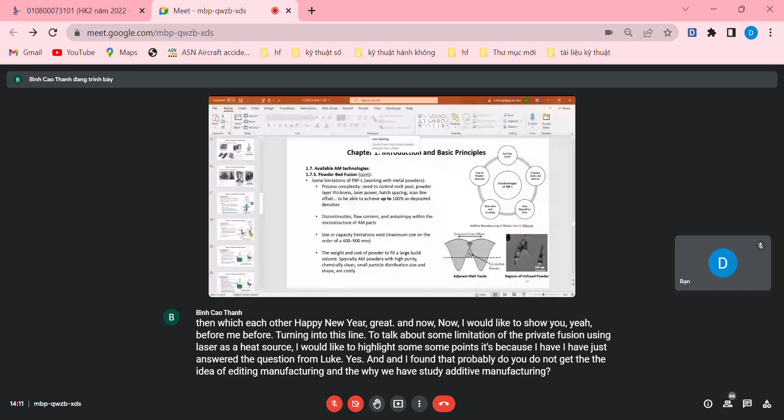Because I have just answered several questions, I found that probably you do not get the idea of additive manufacturing and why we have studied it. You know, but probably you forgot what we discussed the first time, about the advantages and disadvantages of additive manufacturing and the relation between additive manufacturing and sustainability. Let me make this clear, I'll discuss this with you in Vietnamese.

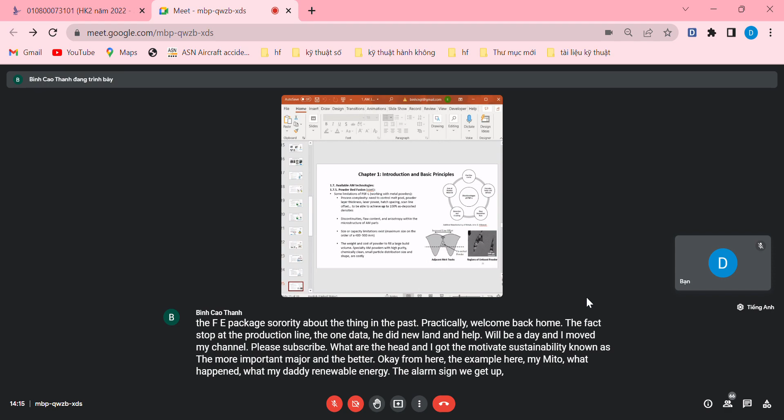Mục tiêu về sustainability là rõ ràng, và mọi quá trình hiện nay, đặc biệt trong chế tạo máy hoặc chế tạo các phương tiện giao thông, người ta đều chú trọng tối ưu hóa cấu trúc để giảm khối lượng, tăng khả năng vận hành, từ tàu, thuyền, máy bay, tàu hỏa. Ngoài ra còn sử dụng năng lượng thay thế, renewable energy, để làm xanh. Việc kết hợp giữa năng lượng thay thế và tối ưu hóa cấu trúc để giảm khối lượng của các vehicle sẽ đem lại rất nhiều lợi ích, hướng chúng ta đến một xã hội bền vững hơn.

Additive manufacturing ngoài việc giảm lượng vật liệu tiêu hao trong quá trình chế tạo, vì đây là near shape component, thì bản chất cũng cho phép chế tạo ra những chi tiết được optimize.

Tại sao những chi tiết optimize này lại phù hợp với additive manufacturing? Bởi vì chúng ta chế tạo layer by layer, nên không cần biết nó phức tạp như thế nào, bên trong rỗng, ngoằn ngoèo ra sao, chỉ cần theo layer by layer approach là có thể chế tạo được những chi tiết phức tạp như thế.

Còn traditional manufacturing process theo phương pháp cutting, dụng cụ cắt phải tiến được đến bề mặt cần cắt thì mới cắt được. Nếu bề mặt cần cắt nằm bên trong chi tiết thì hoàn toàn không làm gì được. Ngoài ra những chi tiết phức tạp sau khi tối ưu thì thường những vùng rỗng bên trong là vùng khối lượng vật liệu không cần thiết, đã được tối ưu và bỏ đi rồi.

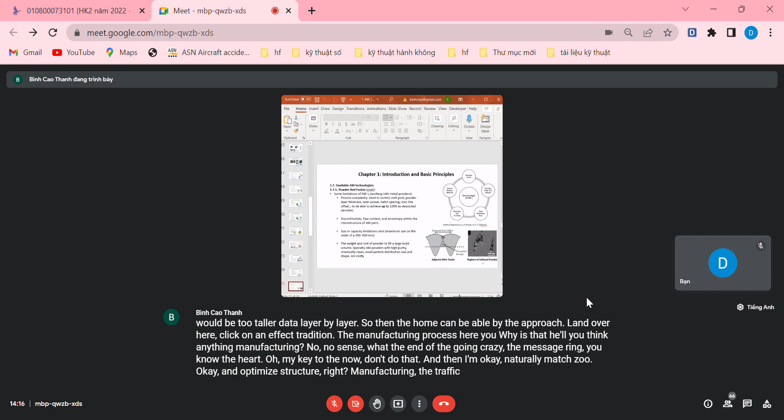Additive manufacturing sản xuất được những chi tiết đó, còn traditional manufacturing thì là dấu hỏi, không phải trường hợp nào cũng chế tạo được. Cho nên nó tạo ra một sự naturally match giữa optimize structure và additive manufacturing. Điều này cho phép chúng ta tiến nhanh hơn tới một xã hội bền vững nhờ chế tạo ra những thành phần của máy giảm được khối lượng, trong khi khả năng sử dụng tương đương, thậm chí tốt hơn so với chế tạo bằng phương pháp truyền thống.

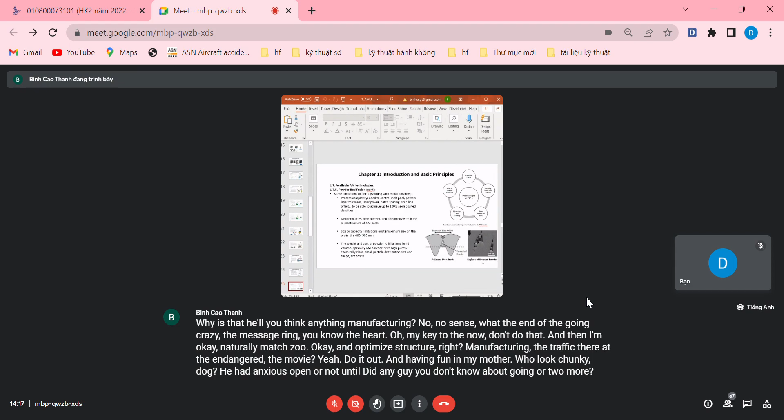Những yếu tố này tôi sẽ nói với các bạn ở cuối chương 1, đó là sustainability advantage and challenge của additive manufacturing.

Tôi muốn giới thiệu trước để các bạn hiểu tại sao người ta đang rất quan tâm đến additive manufacturing, bởi vì khi chế tạo ra những chi tiết đã được tối ưu hóa về cấu trúc thì nó nhẹ hơn rất nhiều. Khi ứng dụng trong lĩnh vực hàng không, khi chúng ta nhẹ đi, có nghĩa là phần năng lượng tiêu thụ để mang mỗi máy bay bay đã được giảm, thì việc sử dụng nhiên liệu sẽ được tối ưu hóa.

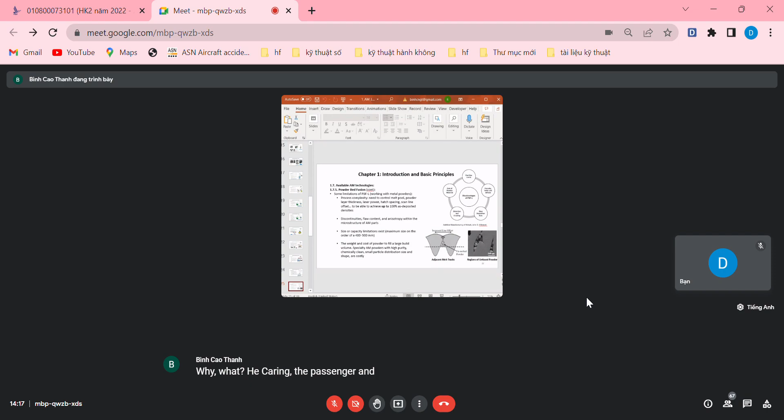Để chúng ta carrying passenger, cargo, hoặc fly with longer distance, đấy là những điều thiết thực mà khi sử dụng additive manufacturing có thể mang lại cho chúng ta.

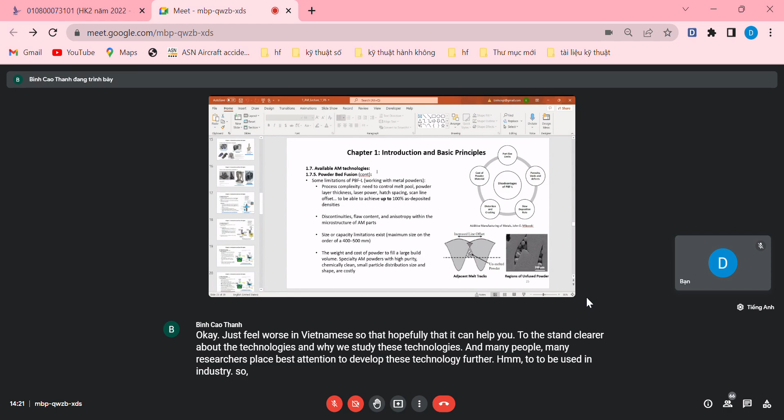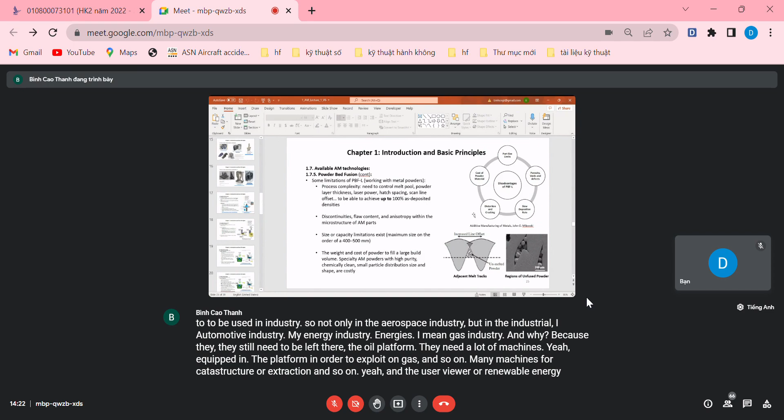Just a few words in Vietnamese so that hopefully it can help you understand clearer about the technologies and why we study these technologies. Many researchers pay special attention to developing this technology further to be used in industry, not only in the aerospace industry, but in other industries like automotive industry, like energy industry, oil and gas industry. Why? Because they still need to build up oil platforms. They need a lot of machines and equipment to build the platform in order to exploit oil, gas, and so on. Many machines are used for gas extraction, oil extraction, and so on. And yeah, and the use of renewable energies like hydrogen, and from the sun.

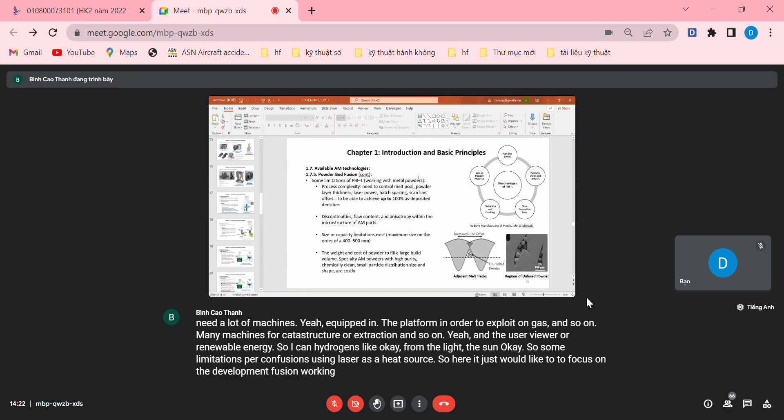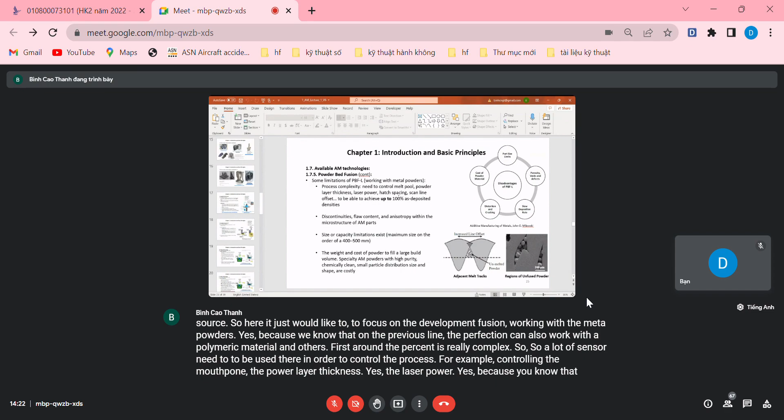So some limitations about powder bed fusion using laser as a heat source. Here I just would like to focus on the powder bed fusion working with metal powders, because on the previous slide, powder bed fusion can also work with polymeric material and others. First of all, the process is really complex, so a lot of sensors need to be used there in order to control the process, for example controlling the melt pool, the powder layer thickness, and the laser power. The layer thickness is quite important. As I've explained before, if the layer thickness is high, is large, then you have the staircase effect, and in this case you would have lower surface quality.

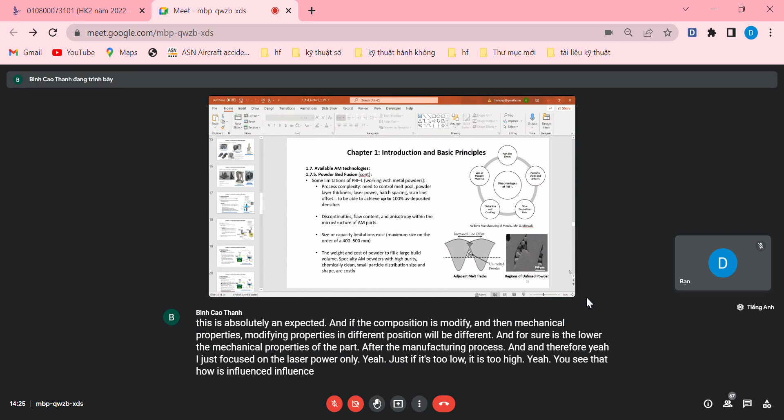So I just focused on the laser power only, showing how if it's too low or too high it influences the quality of the part after manufacturing. Therefore it needs to be controlled using some kind of sensor to check whether it's fine, and to provide feedback to calibrate the system to achieve the highest possible quality.

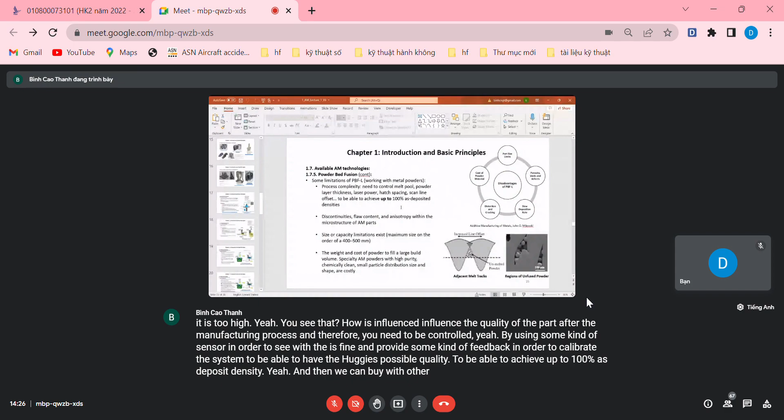This is to be able to achieve up to 100% density. You can also combine this with post-processing steps like hot isostatic pressing, which applies both heat and pressure after the manufacturing process, in order to eliminate porosity and help improve the density up to 100%.

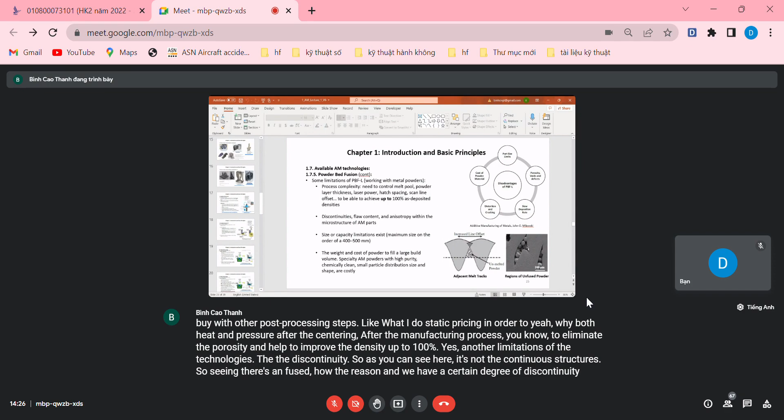Another limitation of the technology is discontinuity. As you can see here, the structure is not continuous. Since there are unfused powder regions, we have a certain degree of discontinuity, and this region generates stress concentrations. We need to eliminate the stress concentration areas, but here we have this limitation.

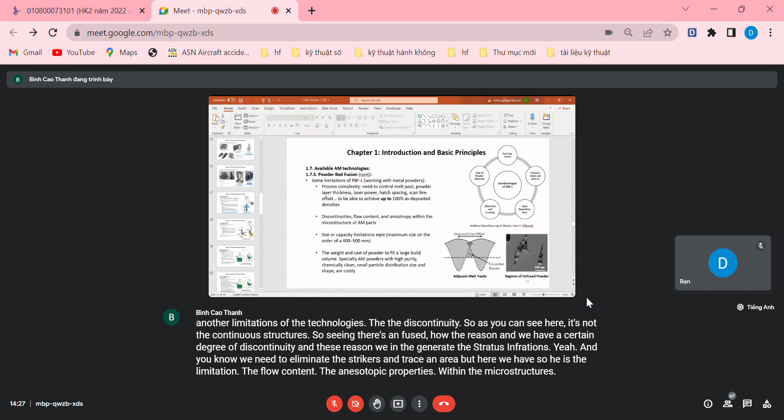The resulting anisotropic properties within the microstructure occur for sure, because it's a layer-by-layer building approach, and therefore not only this technology but other AM technologies also create materials with anisotropic properties.

Size and capacity limitation, yeah for sure. As I explained, especially for powder bed fusion, everything needs to be handled inside the building chamber, so the size of the building chamber will limit the size of the part.

In another case, if you want to create a part larger than the building chamber, you may think of dividing the part into different subcomponents, and after printing the parts or subcomponents, you assemble them together. But it should not be too large with respect to the limitation.

Also, if you divide the part into different subcomponents, you should consider that it will be more complex, and the cost for the designing process and the material will be greater, for sure.

The weight and cost of powder to fill, yes, this is one of the points.

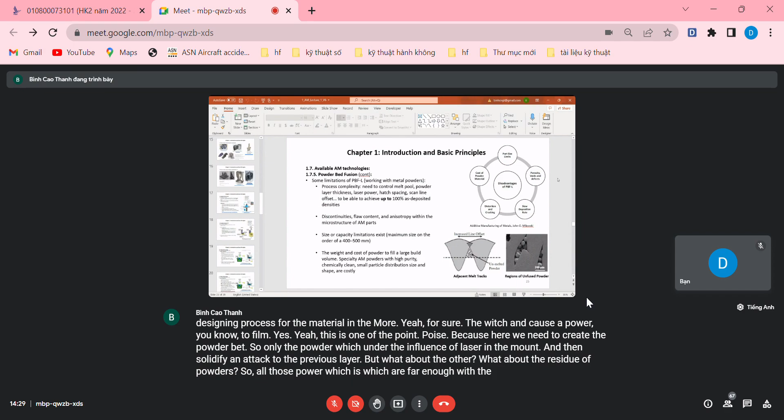Because here we need to create a powder bed, only the powder under the influence of the laser will melt, solidify, and attach to the previous layer. But what about the other, residual powders? What about those powders that are far enough from the irradiated laser irradiation areas?

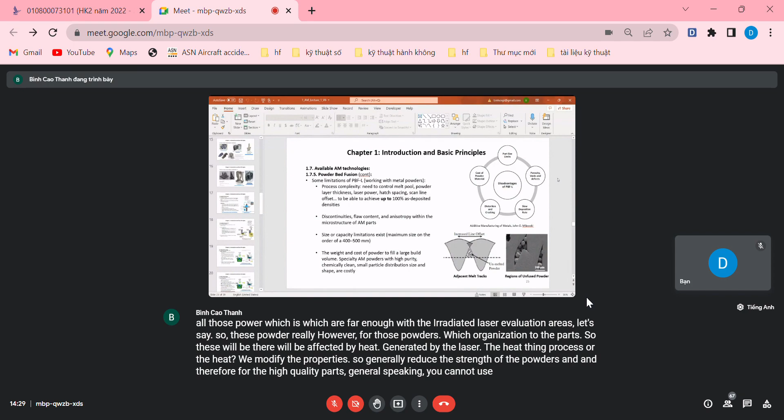So these powders are used. However, for those powders adjacent to the parts, they will be affected by the heat generated by the laser. The heating process modifies the properties, generally reducing the strength of the powders. Therefore, for high quality parts, you generally cannot use the residual powder after the manufacturing process.

You must recycle it to guarantee the quality of the part. But for other cases, if the part does not require the highest quality, you can reuse the powder simply to save money.

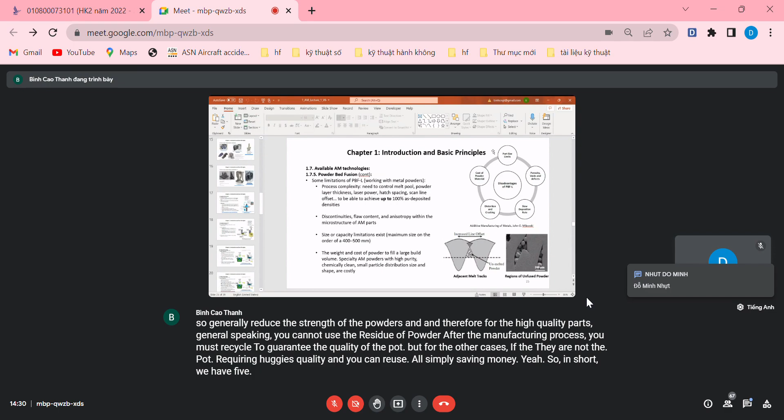So in short, we have five remarkable limitations, which are graphically represented in this figure. The part size limit is due to the size of the chamber.

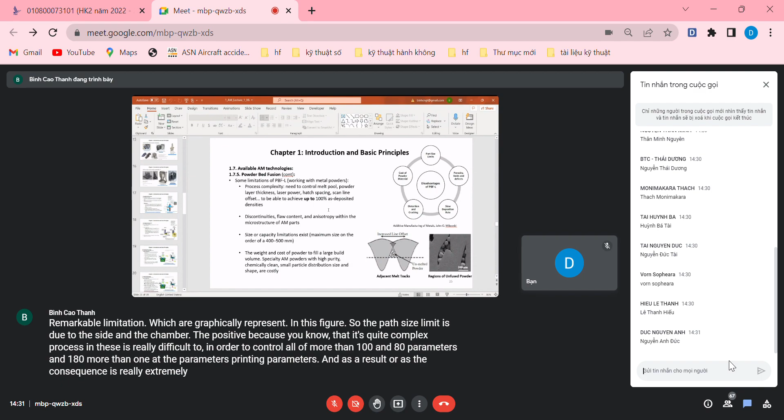The porosity issue arises because it's quite a complex process, and it's really difficult to control all of the more than 180 printing parameters. As a result, it's extremely difficult to obtain 100% relative density. In other words, you should expect the presence of porosity, voids, and other kinds of defects like flaws.

Slow deposition rate, yes, sure, because the minimum layer thickness is just 20 microns. So the larger the part is, the larger the number of layers needed in order to fabricate the part. Because the layer thickness is small, you need many more layers to completely fabricate the part, and that slows down the production rate.

And you also need time in order to melt the material and wait for solidification. So it needs time as well.

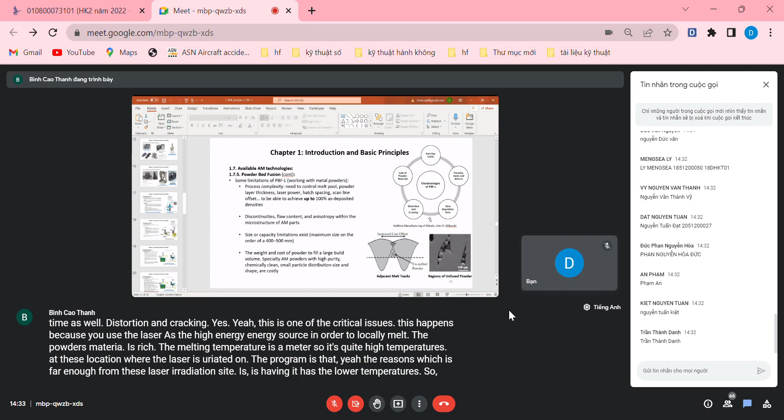Distortion and cracking, yes, this is one of the critical issues. This happens because you use the laser as a high energy source to locally melt the powder material, reaching the melting temperature of the metal, which is quite high. At the location where the laser is irradiated, the other regions far enough from the irradiation site have lower temperatures. So there exists a thermal gradient between the two regions of the same part.

So it creates residual stress. And when the stress is released after the manufacturing process, it creates distortion and cracking.

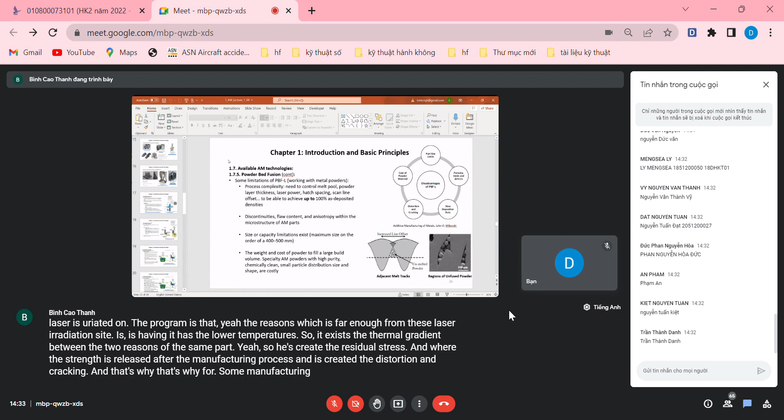For some manufacturing processes like powder bed fusion, we will heat up the building plate up to, for example, 200 degrees C, in order to reduce the differences in temperature in different regions of the part, to avoid distortion and cracking.

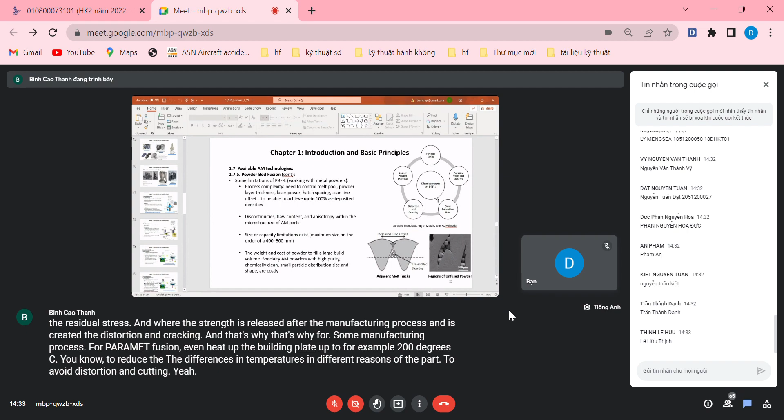And also the presence of support structures helps to dissipate the heat from the part during the manufacturing process, to somehow guarantee that the thermal gradient inside the part is reduced, and to reduce or avoid distortion and cracking.

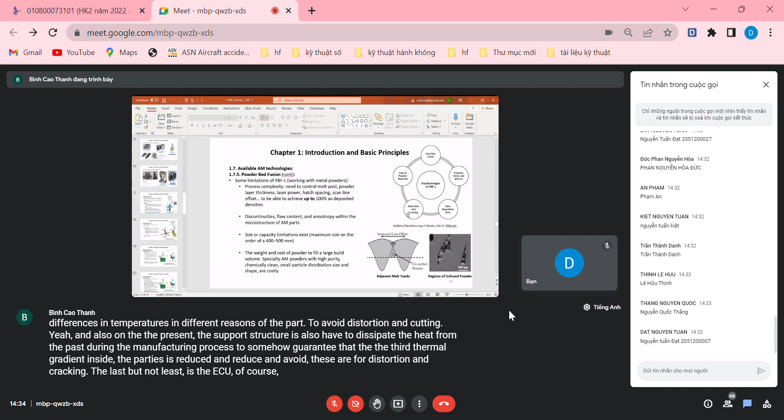Last but not least is the issue of cost of powder materials, because generally speaking we want to have regular powders in a spherical shape. If you have an irregular powder shape, packing them together with high density is pretty hard.

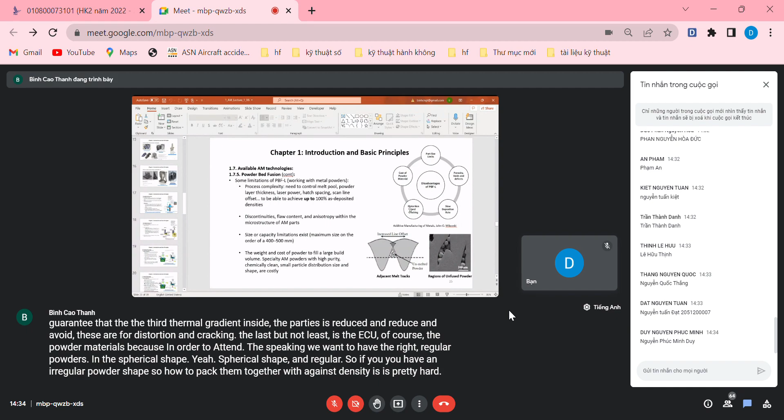And the cost for making powders is relatively high, resulting in the high cost of the part after the manufacturing process. This is the high cost of the product.

Just one point, but it's a little bit difficult to explain here. You see the figure named adjacent melt track, next to the figure highlighted with the region of unfused powder. So you see, if there are two scanning lines or scanning vectors.

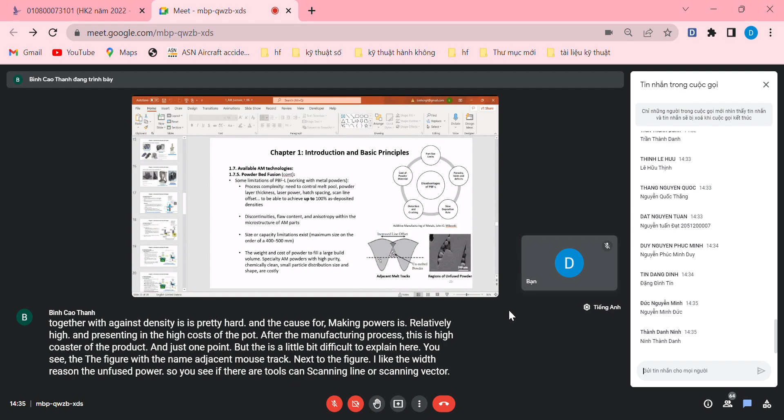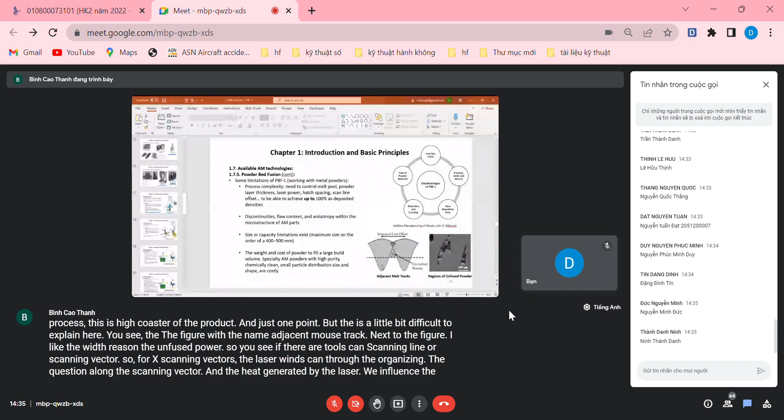For the scanning vectors, the laser will scan through the cross section along the scanning vector. The heat generated by the laser will influence the surrounding areas with respect to the scanning vector. In the gray area, the heat will be enough to melt the powders. In other regions not covered by the gray color, the heat will not be enough to melt the powders.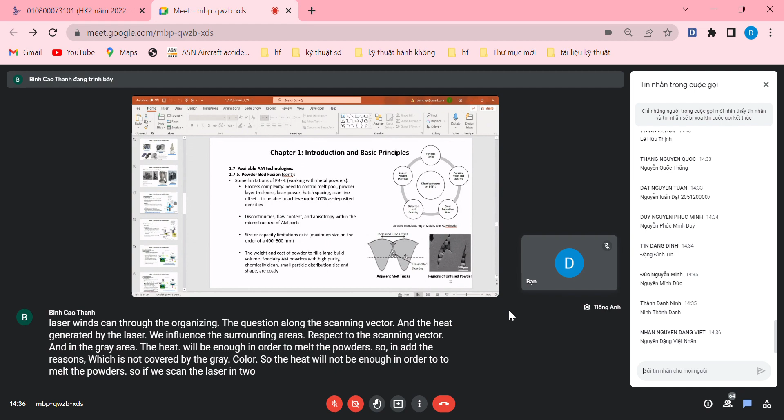So if we scan the laser into adjacent tracks, and the distance between the two tracks is far enough, the overlap region is small, and you see there is some kind of triangular area which does not have enough energy to melt the powder. So we have unmelted powders. On the right side, you see the microstructure of the unmelted region.

And this will contribute to increasing the risk of cracking occurring after the manufacturing process. I will discuss this with you in a bit more detail in chapter 3, or more or less. More or less, I do not remember exactly, but we will talk about it later.

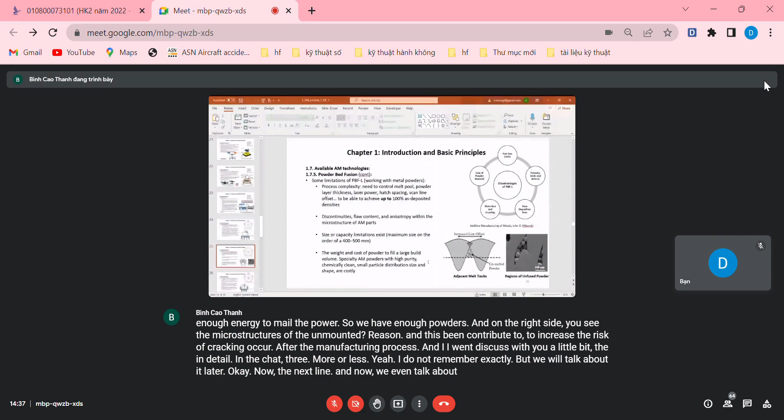And now we will talk about the advantages and disadvantages of the powder bed fusion technique. These techniques use electron beam as a heat source. Both the laser and the electron beam are heat sources with high energies. These energies are used to locally melt the metal powder materials, so they should be high enough to melt the metallic materials.

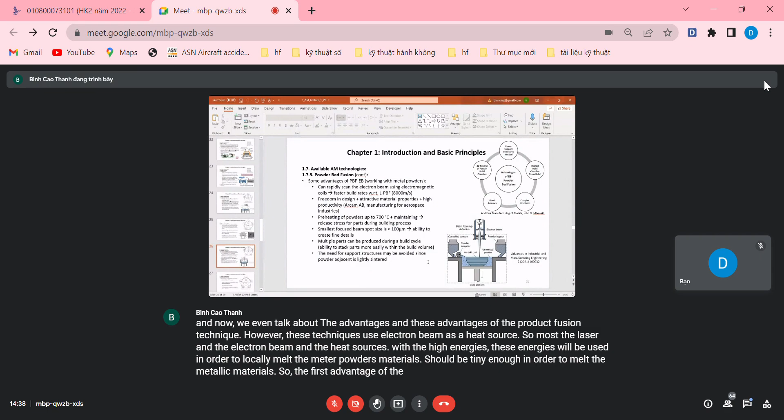So the first advantage of powder bed fusion using electron beams is that it can rapidly scan the electron beam via the electromagnetic coil. You can see the electromagnetic coil here - this is the coil, used to drive the electron beam, or to control how the electron beam is radiated onto the surface of the powder for melting these powders.

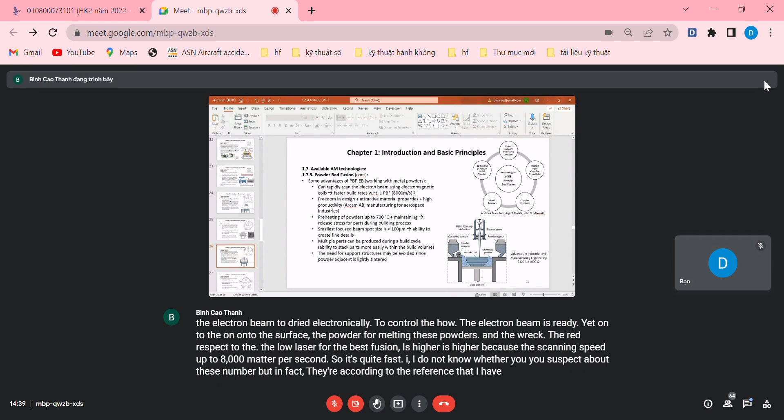And the build rate with respect to the laser powder bed fusion is higher because the scanning speed is up to 8,000 meters per second, so it's quite fast. I don't know whether you suspect this number, but according to the reference I've read, it's 8 kilometers per second for the scanning rate, or scanning velocity, of the electron beam.

The free-forming design, yeah, for sure, because it belongs to the powder bed fusion AM technologies, so it can be used to fabricate quite complex parts, even free-form designs. And the material synthesized by this technology has quite attractive properties. And since we have the ability to rapidly scan the electron beam, it increases the productivity of the process.

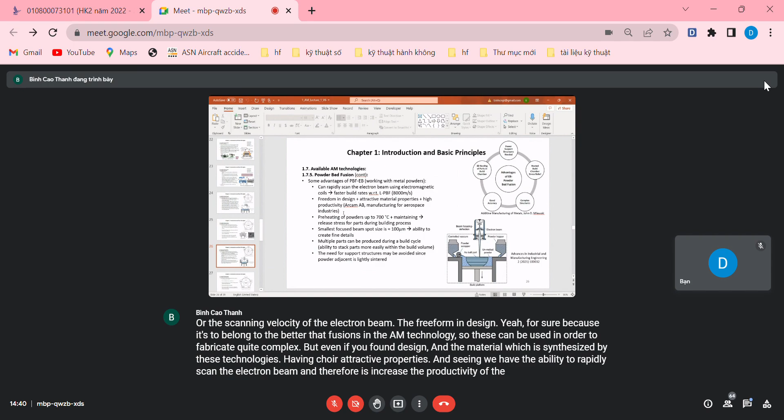And Arcam AB is one of the companies which uses powder bed fusion with the electron beam as the heat source for manufacturing aerospace industry, for manufacturing different components that can be used in the aerospace industry.

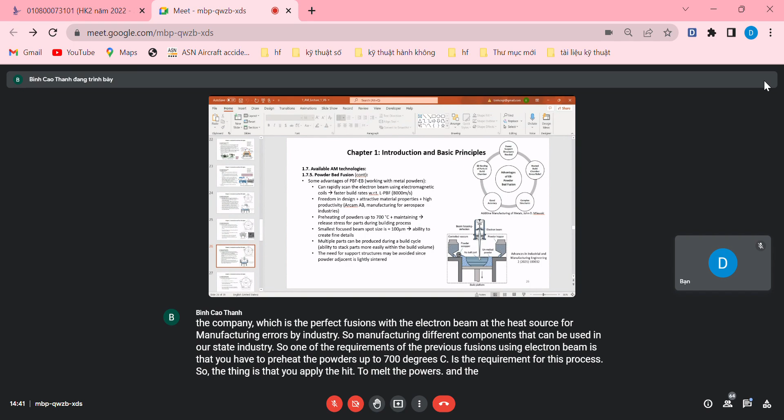So one of the requirements of powder bed fusion using electron beam is that you have to preheat the powders up to 700 degrees C. This is the requirement for this process. So the idea is that you apply heat to melt the powders, and the molten material solidifies and attaches to the previous layer.

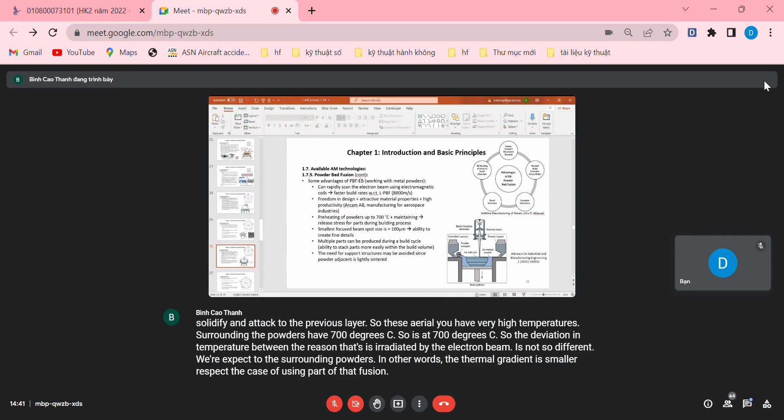So at this area you have very high temperatures, while the surrounding powders have 700 degrees C. So the deviation in temperature between the region irradiated by the electron beam is not so different with respect to the surrounding powders. In other words, the thermal gradient is smaller compared to the case of using powder bed fusion with laser as a heat source, and therefore it reduces the thermal gradients or stress concentrations.

And therefore it reduces the distortion and cracking after the manufacturing process.

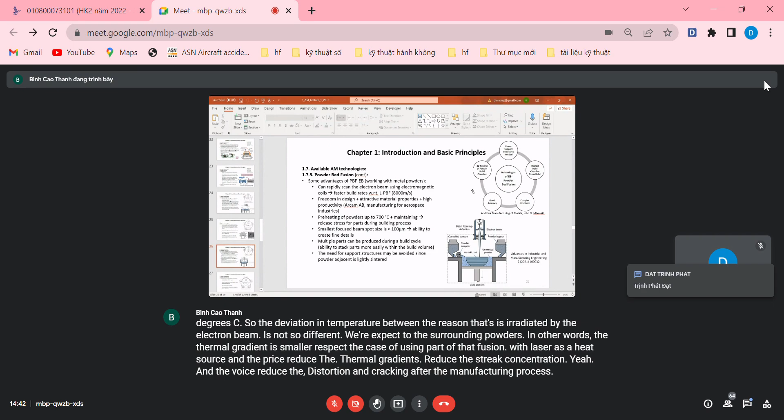The smallest focused beam spot size is around 100 microns. In other words, you have the ability to create fine details. However, I would say, comparing to the case of laser, this is maybe the largest spot size beam with respect to the case of laser.

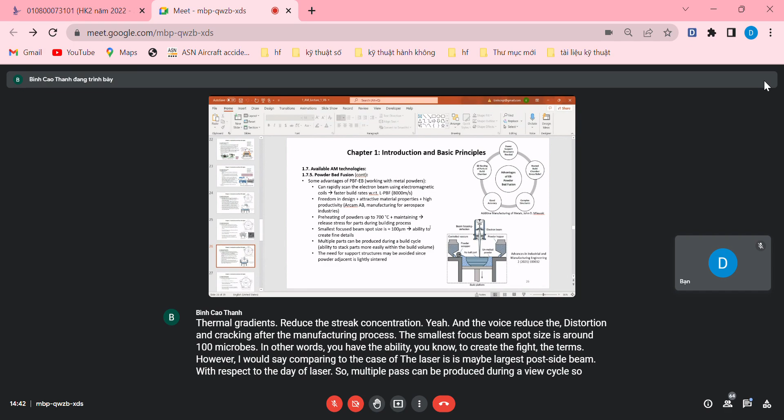So multiple parts can be produced during a build cycle, which is similar to the case of using powder bed fusion with laser as a heat source.

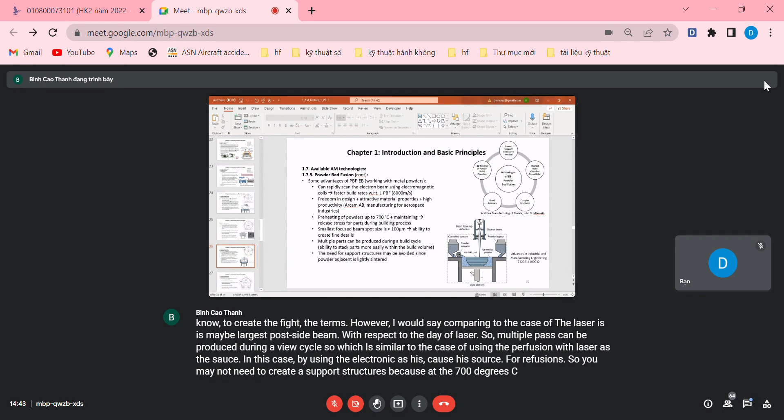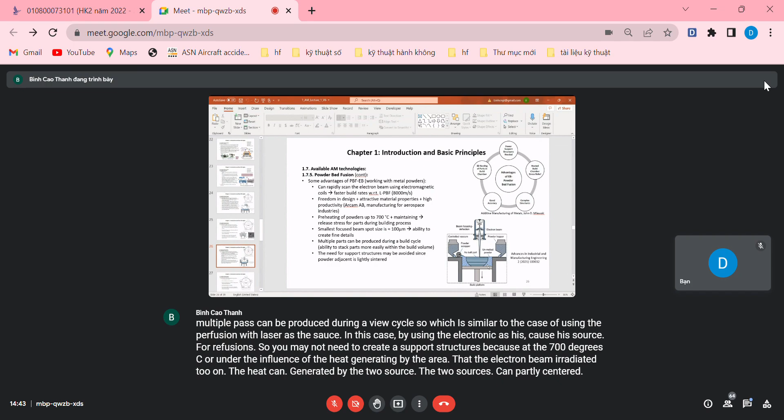In this case, by using the electron beam as a heat source for powder bed fusion, you may not need to create support structures because at 700 degrees C, under the influence of the heat generated by the area that the electron beam irradiates on, the heat generated by the two sources can partly sinter the surrounding powder. This means we provide a certain mechanical strength to the surrounding powder so that it can support the down-facing surface of the part, and this helps to reduce or eliminate the support structures for the part or for the down-facing surfaces of the part.

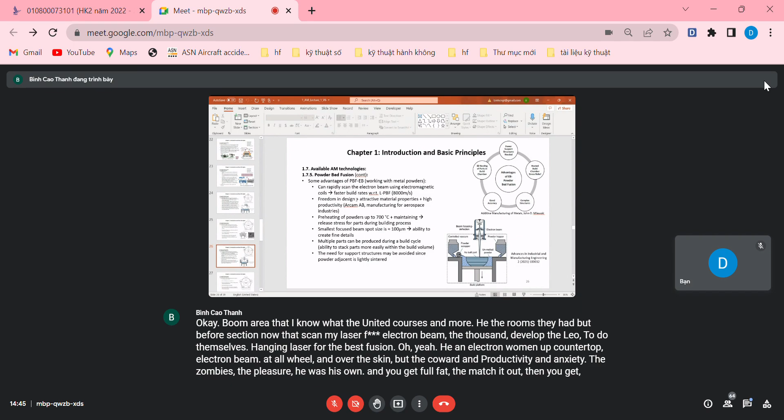Giống như anh Powder Bed Fusion sử dụng laser thì đều có thể sử dụng những phương pháp để chế tạo ra những chi tiết không giới hạn về mặt hình dáng, nghĩa là nó complex, thì phương pháp này cũng không gặp bất kỳ khó khăn nào trong vấn đề tạo hình chi tiết. Và cơ tính của vật liệu sau quá trình chế tạo thì nó cũng rất là attractive, rất là thu hút. Tốt xấu thế nào thì chúng ta chưa nói, nhưng mà nó rất là attractive.

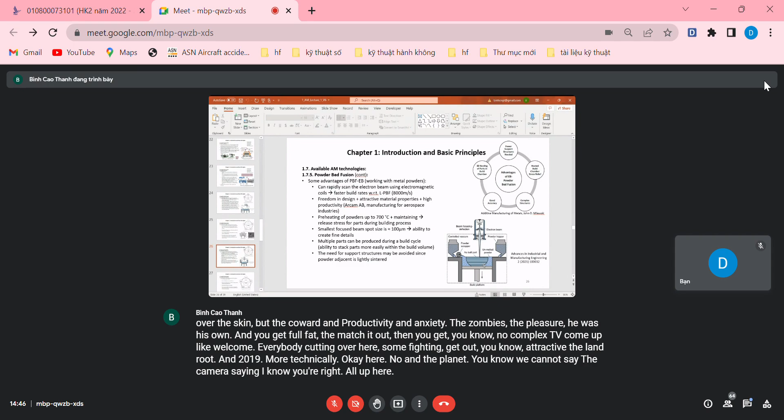Một trong những điều kiện để thực hiện được phương pháp này là cái powder phải được gia nhiệt ở nhiệt độ 700 độ C. Thì cái 700 độ C này nó đóng nhiều vai trò lắm. Một trong những vai trò đấy là giảm chênh lệch nhiệt độ giữa bề mặt chi tiết và vùng chi tiết được chiếu bởi tia electron beam. Nhờ đó sự chênh lệch về nhiệt độ giữa bề mặt và bên trong chi tiết nó không nhiều, sẽ giảm được trạng thái ứng suất dư đi.

Ngoài ra, khi có một nhiệt độ cỡ khoảng 700 độ C cung cấp cho chi tiết này thì nó cũng giúp làm giảm trạng thái ứng suất dư có bên trong chi tiết trong quá trình chế tạo. Nó giống như quá trình ram thôi, hoặc quá trình khử ứng suất dư, thì quá trình gia nhiệt nó tương tự như vậy.

Điểm hội tụ của kích thước tia electron beam này cỡ khoảng 100 micromet, cho nên nó cho phép chúng ta tạo ra những chi tiết có hình rất là chi tiết. Tuy nhiên tôi cũng lưu ý với các bạn là spot size của anh electron beam này, nói gì thì nó vẫn to hơn so với spot size của anh laser. Cái anh laser nó hội tụ tốt hơn.

Đem so sánh với anh Powder Bed Fusion mà sử dụng nguồn nhiệt là laser, thì anh Powder Bed Fusion sử dụng nguồn nhiệt là electron beam này, cùng giống nhau là nó sản xuất ra chi tiết ở trong một cái build chamber, đúng không ạ? Và chỉ cần build chamber đủ lớn và chi tiết đủ nhỏ, chúng ta có thể chế tạo được multiple parts at the same time.

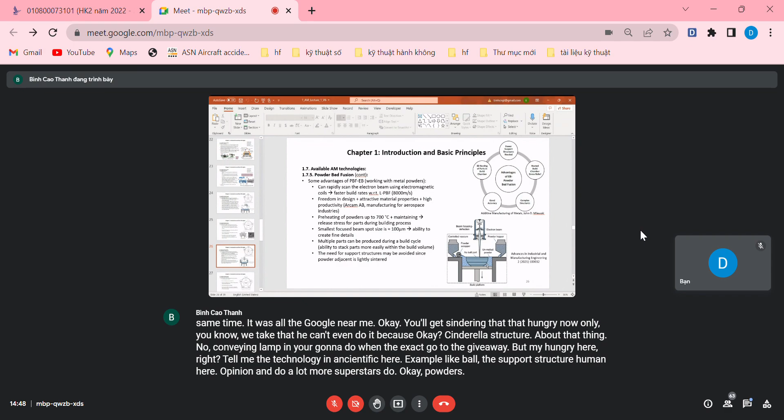Tuy nhiên mặc dù loại bỏ được support structure, nhưng việc tái sử dụng những powders đương nhiên sẽ gặp khó khăn, bởi vì cái này nó là lightly sintered powder rồi, nghĩa là nó là một cụm powders chứ không phải là từng hạt powders nữa. Cho nên việc tái sử dụng thì người ta sẽ phải xem cái nào không dính cục lại với nhau thì cái đấy mới dùng được. Còn khi đã tạo thành một cái gọi là agglomeration, sự cố kết của những hạt powder rồi, thì chúng ta không dùng được nữa.

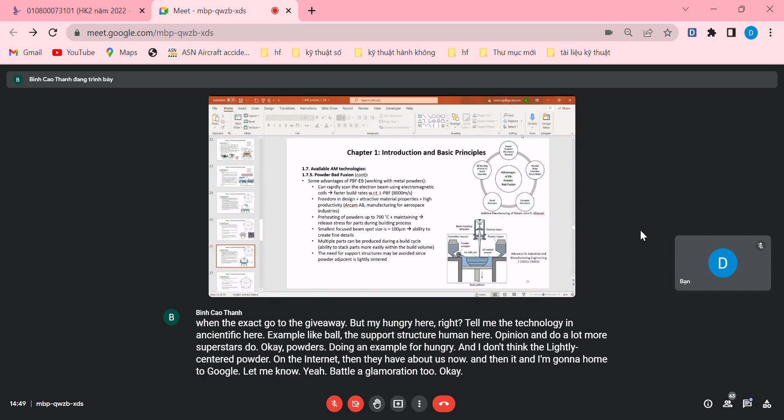Như vậy cũng tương tự như đối với dùng nguồn nhiệt laser cho Powder Bed Fusion, thì các bạn sẽ có 5 ưu điểm chính của phương pháp Powder Bed Fusion. Đó là có thể sử dụng ít support structure. Chúng ta biết rằng support structure sau khi chế tạo xong ấy, thì chúng ta sẽ phải loại bỏ nó, bởi vì nó...

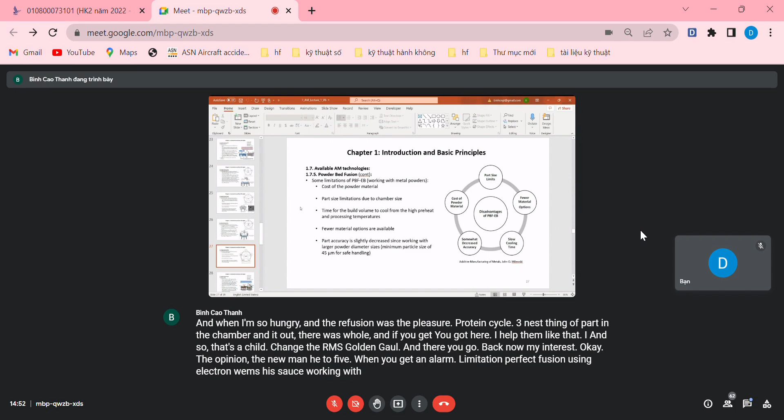Some limitations of Powder Bed Fusion using electron beam as heat source working with metal powders. One of the issues is associated with the cost of the powder material, similar to the case of Powder Bed Fusion using laser as heat source.

We also have the limitation associated with the part size, because everything needs to be processed inside the building chamber, and the size of the building chamber will limit the size of the part which needs to be printed out.

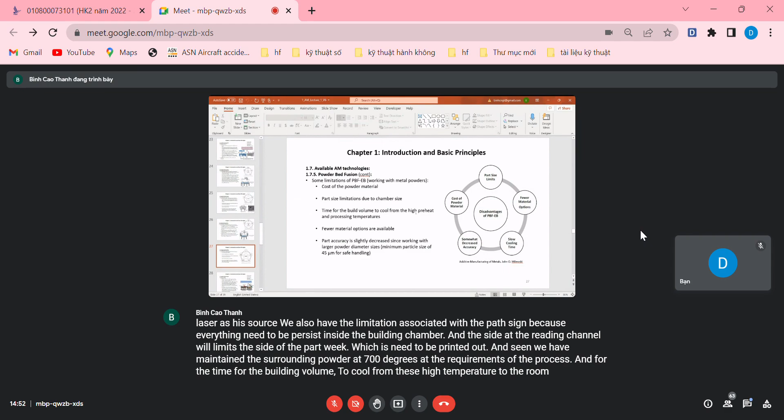Since we have maintained the surrounding powder at 700 degrees C as required by the process, the time for the building volume to cool from this high temperature to room temperature will be longer, because the surrounding powder is at 700 degrees C. How can you touch to remove the part from the building chamber at 700 degrees C? You must wait until the temperature reduces to room temperature before you remove the building plate together with the parts for post-processing, for example.

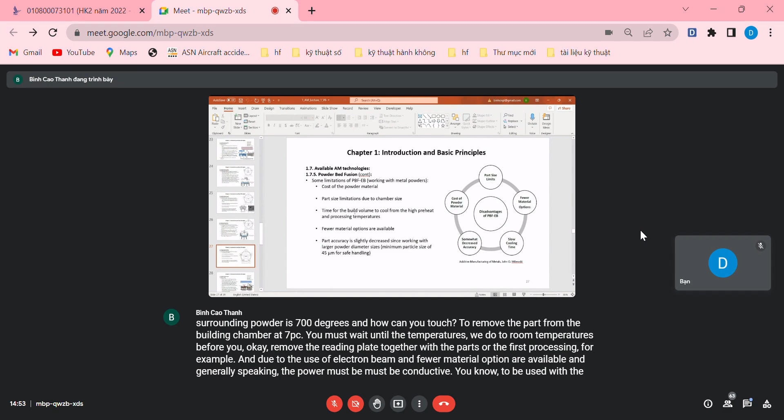Due to the use of electron beam, fewer material options are available, and generally speaking, the powders must be conductive to be used with the electron beam. Unlike the case of laser, you just need to apply the laser, and the laser will provide enough heat in order to locally melt the part. But in this case, the powder needs to be conductive.

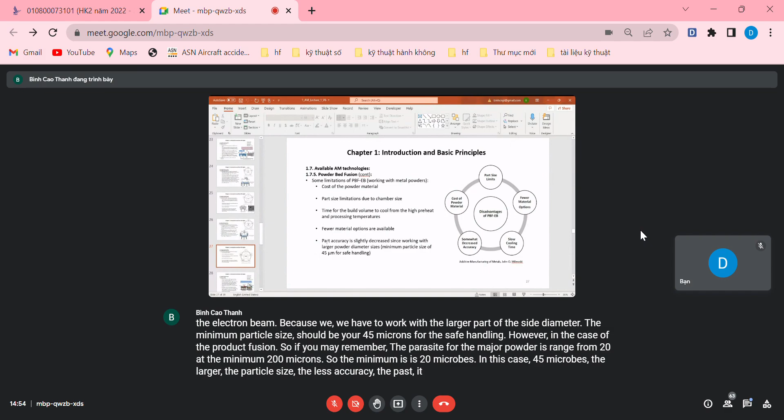The part accuracy is also a limitation of Powder Bed Fusion using the electron beam, because we have to work with a larger powder size diameter. The minimum particle size should be 45 microns for safe handling. However, in the case of Powder Bed Fusion with laser, if you may remember, the powder size for the metal powder ranges from 20 microns as the minimum to 100 microns. So the minimum is 20 microns, but in this case, 45 microns. The larger the particle size, the less accurate the part is.

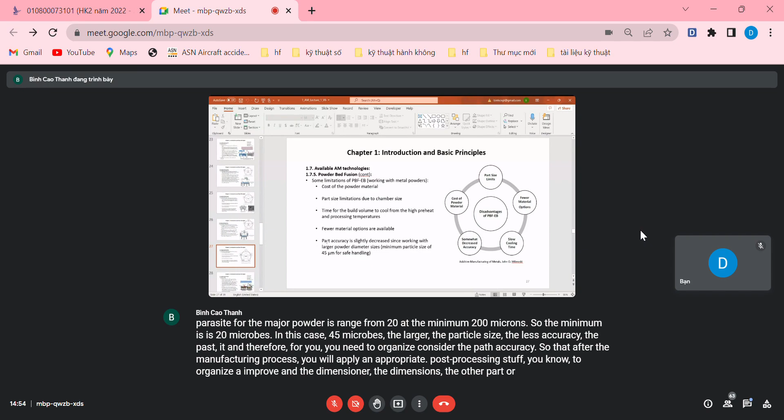Therefore, you need to consider the part accuracy, so that after the manufacturing process, you will apply an appropriate post-processing step in order to improve the dimensions of the part, or improve the properties of the part. This can be either surface quality or mechanical properties, and so on.

So this figure just briefly summarizes the disadvantages of using powder bed fusion with electron beam as the heat source. We have the part size limits, because it depends on the building chamber.

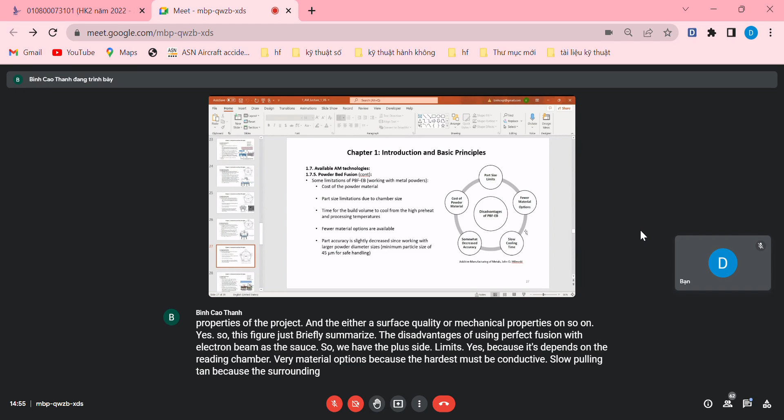Fewer material options because the powders must be conductive. Slow cooling time because the surrounding temperature is 700 degrees C, and you need to wait for a longer time in order to cool down to room temperature.

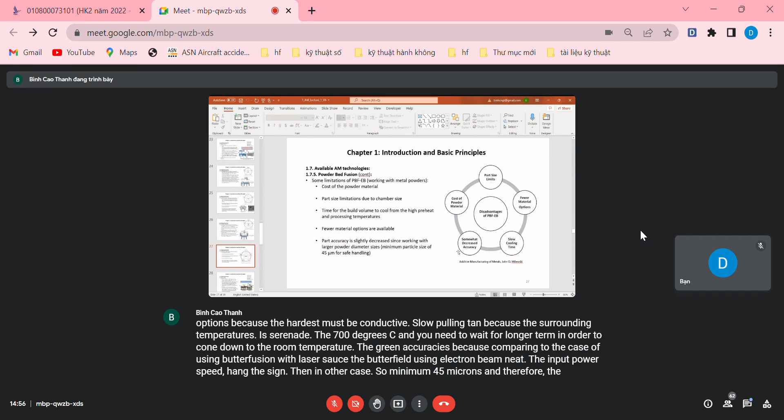Decrease in accuracy because comparing to the case of using powder fusion with laser source, powder fusion using electron beam needs input powders with a higher size than the other case. So minimum 45 microns, and the larger the powders, the less accuracy passed after the manufacturing process by additive manufacturing.

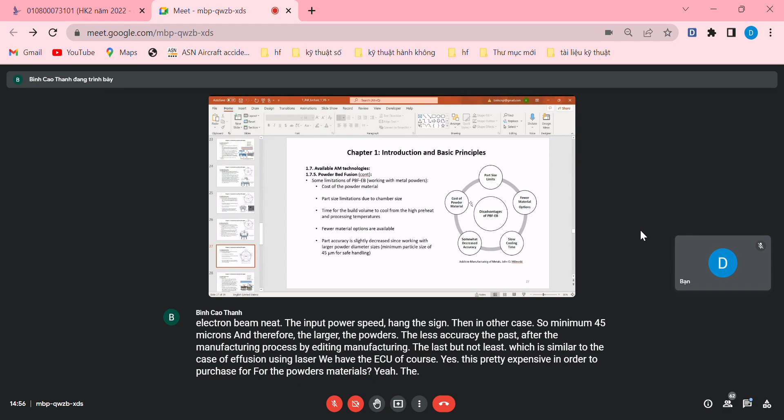And last but not least, similar to the case of powder fusion using laser, we have the issue of cost. It's pretty expensive to purchase the powder materials, because of the synthesizing process, how to store the powders, and how to avoid the influence of environment on the powders to guarantee good quality, which also contributes to the higher cost of powder material comparing to other cases where you need filament material.

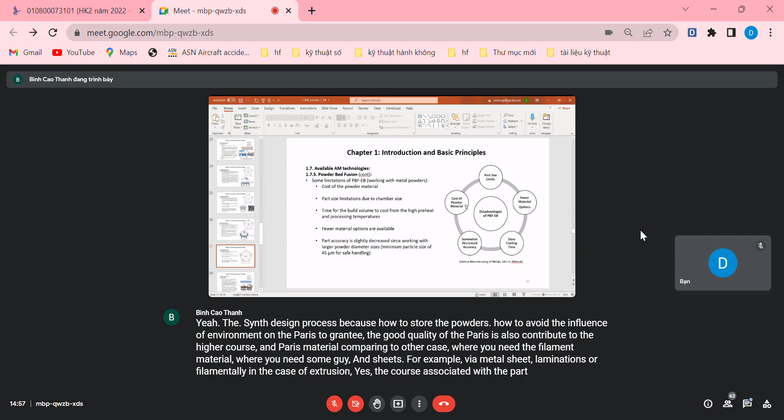For example, metal sheet laminations or filament like in the case of extrusion. So the cost associated with powder is relatively high comparing to other cases. And those are the limitations for powder bed fusion.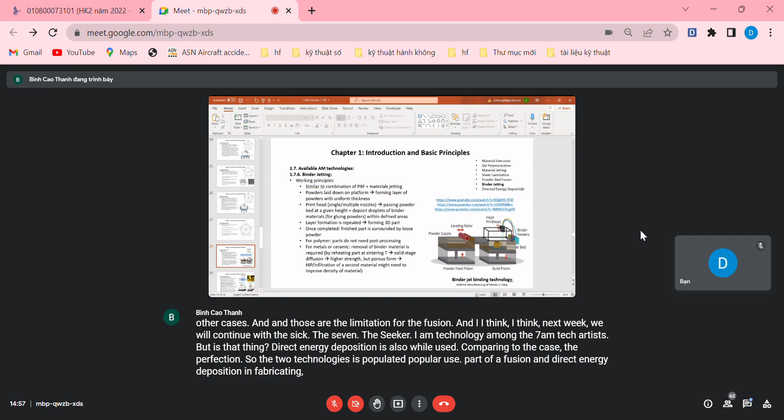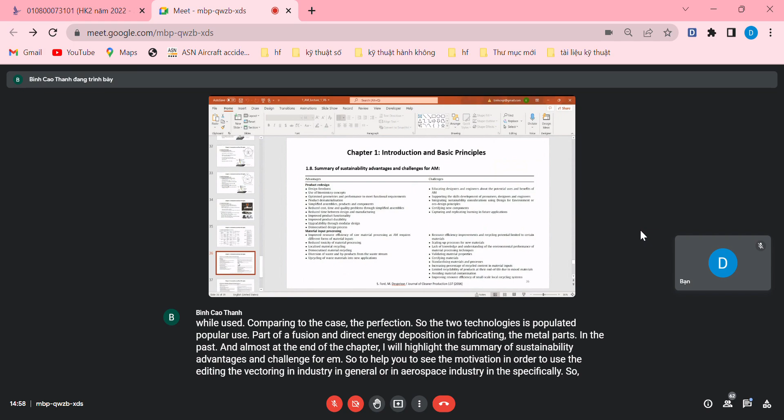Almost at the end of this chapter, I will highlight the summary of sustainability advantages and challenges for AM, to help you see the motivation to use additive manufacturing in industry in general, or in the aerospace industry specifically. You should have something to motivate you to study the course, so you will study it more effectively.

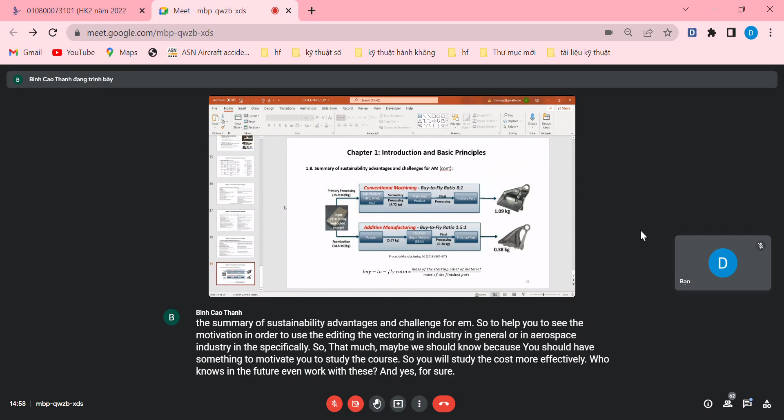And who knows, in the future you will work with this. And yes, for sure, some things that you may be interested in. But anyway...